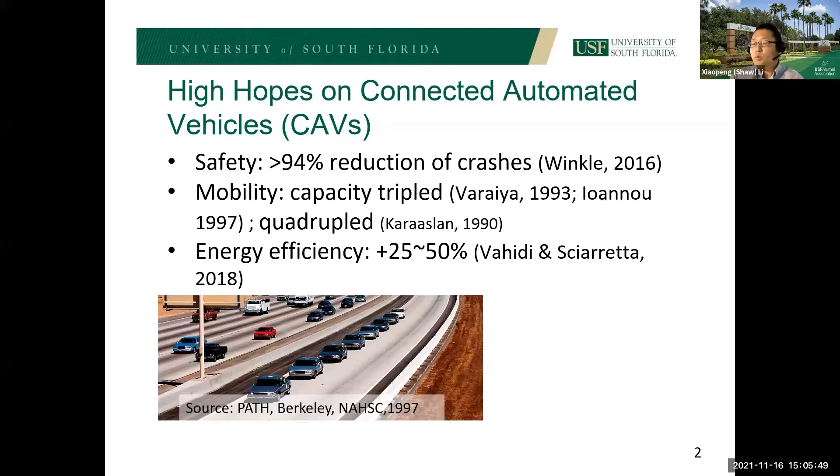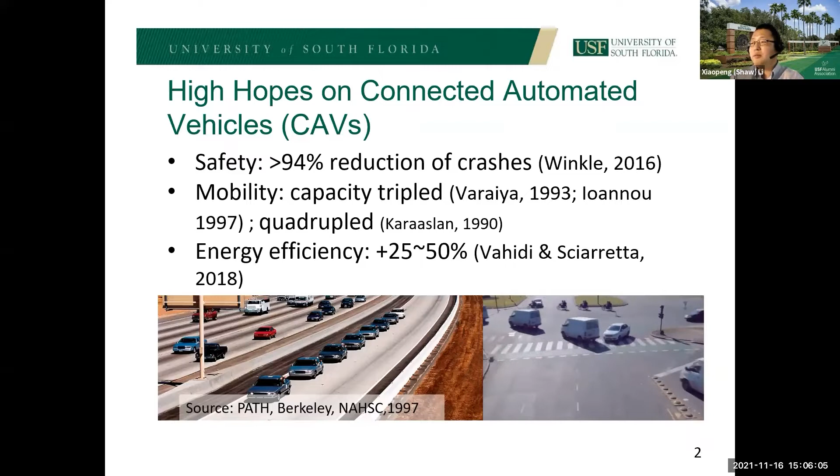With this, it seems like we're on the right track to a utopian world like this, where almost all road users can exist in harmony without even any stop. So that's great, but where are we now? We want to have some status check. So current status, if you look into the deployed and implemented technologies at mass scale, you're going to see the automated vehicles are really ahead of the curve, because we've seen many level 1 and level 2 automated vehicles running on the road. Maybe many of you already have automated vehicles with these features.

So we can see that most new production vehicles have autopilot, adaptive cruise control, these kinds of AV features. And this penetration rate is expected to increase a lot over the years. And I want to draw your attention to the key technology called Advanced Driver Assistance Systems, or ADAS. The component that is most relevant to transportation system performance longitudinally would be adaptive cruise control. And many of you may have cars with this capability already.

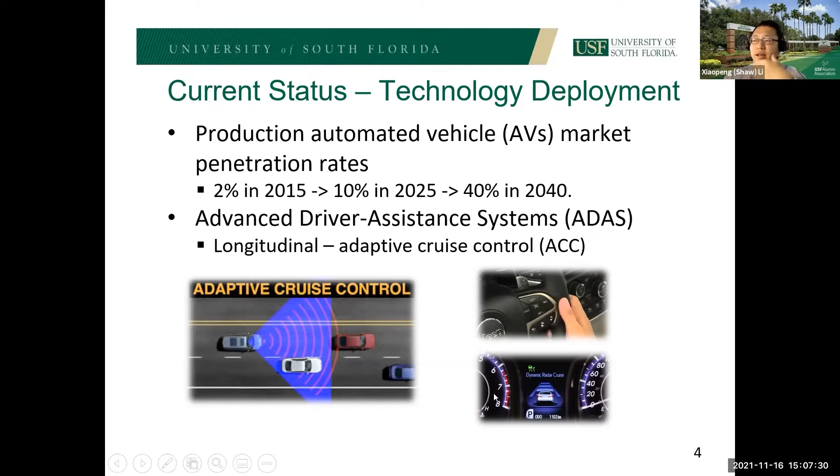It's just like you have an option to choose the desired headways 1, 2, 3, 4, and then this vehicle is going to automatically follow the preceding vehicle without your input on the gas or the brake. So that's the status of the state of the practice. Well, now we're going to look at the benefit. Safety: it is reported that ADAS vehicles could reduce body injury claims by 27% and reduce property damage claims by 19%.

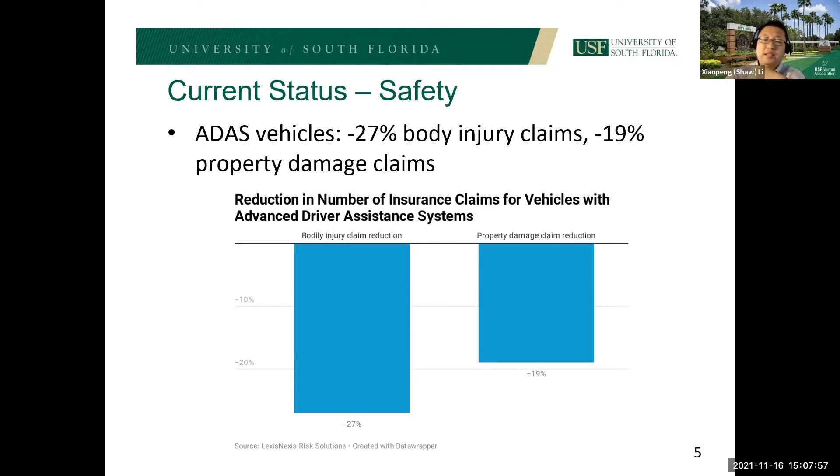What about mobility? You know, the fact is that these companies don't report the mobility performance of these features. So we have to conduct the field tests ourselves and get the data from other collaborators. With this data, we analyze the trajectory data with traffic flow knowledge and convert them into flow and density. We plot out these relationships, also known as the fundamental diagram, for ACC vehicles from automaker 1.

And let me see whether you can see my... let's see, I need to find a pointer, let me see.

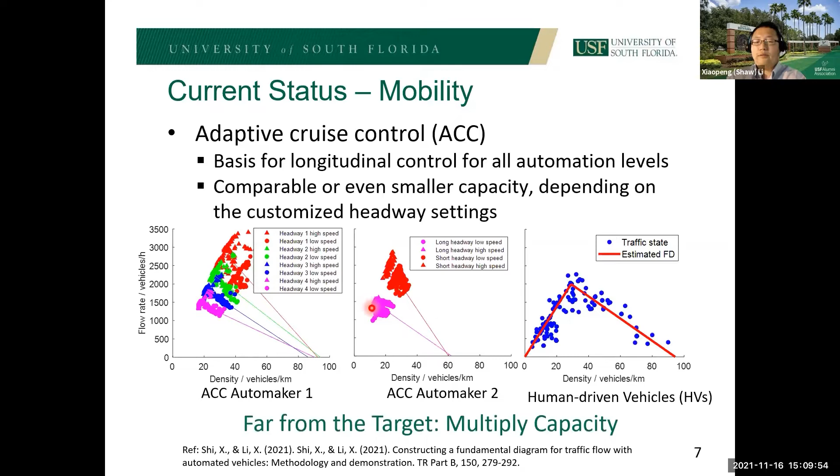All right, ACC vehicle automaker 1 and also ACC vehicle automaker 2, and also comparing them with the data we extracted from human-driven vehicles. And we see that, on the contrary, the capacities of these ACC vehicles or low-level AVs are comparable to that of the human drivers, or in some settings even lower. So this is quite far away from the target of multiplying capacity.

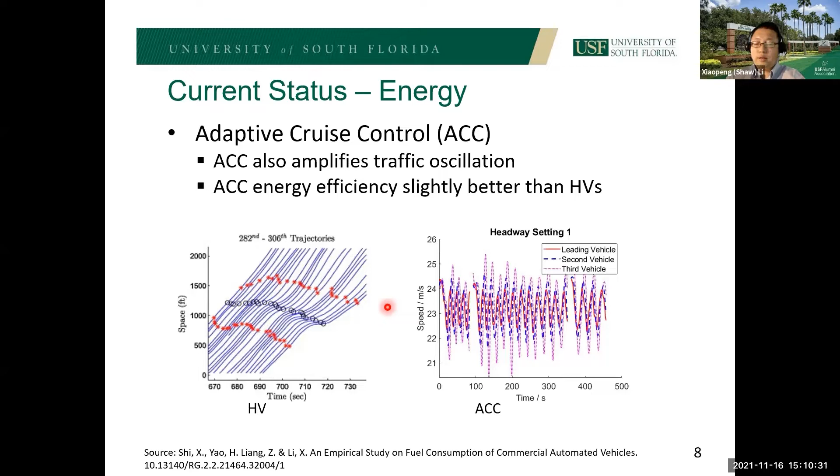Then energy, we also did some experiments to compare human-driven vehicles and these production AV vehicles' energy performance. So basically, both of them amplify traffic oscillations and form stop-and-go traffic eventually. ACC, or AV, could improve the energy slightly, but that's still not close to the target, and there is still quite some room for improvement.

So with this, we can see the potential benefits of the next phase of connected vehicles integrated with automated vehicles. Let's look at the marginal benefits of connected vehicles on top of automation. So in terms of safety, though we hoped CVs could improve the safety a lot, now it looks like from the real world, we observed safety benefits from AVs. They're coming, and this sort of reduces the marginal safety benefits of CV. My bold guess is that AVs alone can improve a lot of safety, and CVs can have some marginal improvement as well.

But the major potential in the future will be at mobility and energy, because from what you see, AV alone doesn't seem to improve much on mobility and energy. And the best outcome is integrating AV and CV, so we can have cooperative driving automation transportation systems, or CDA transportation systems, to realize the full potential of mobility and energy.

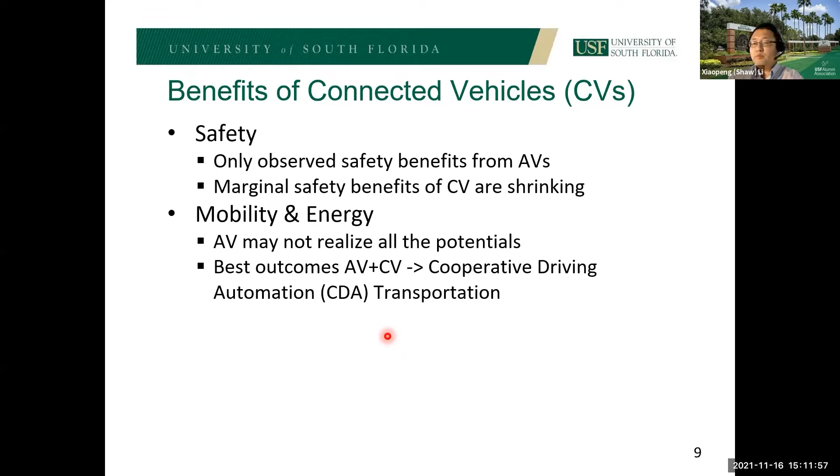However, it is not a smooth road. We know that the FCC provided DSRC, the signature technology for connected vehicles, in 1999, but they took it back in 2020, disappointingly. But the good side is we still see exciting research and piloting programs going on, like the NYC connected vehicle project.

That's proud of your city.

But overall, compared with AV technologies that are already widely deployed in commercial products, CVs are limited to pilot tests and research projects. We don't have massive evidence showing CV benefits yet. So why do we have such great challenges? I'm going to talk in more detail. There are many reasons from different sectors, but I'm going to just talk about some challenges that I perceive from the perspective of engineering, from these three perspectives: system, technology, and user incentives.

So first, the challenge is system complexity, and we hope to address it with system modeling. AV technology alone, if you get to the control level, is actually not that difficult from a transportation engineer's perspective. I know perception of AV is immensely difficult, but on top of that, control is just reactive control of individual vehicles. That's pretty much car following plus lane changing. That's what you guys and we are looking at on a daily basis.

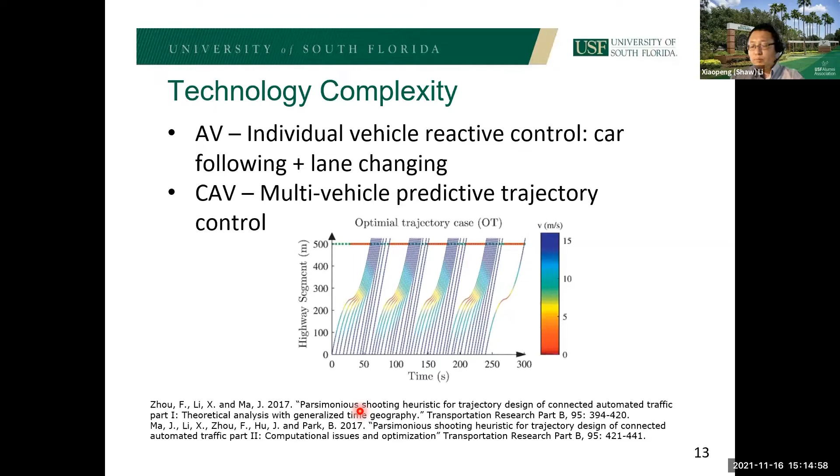So we're among the first batch of publications in the methodology work in this area, and we proposed a number of models. Just to give you an example, I'm going to talk in depth about some of our recent work regarding the key to CAV mobility and energy. So why did I highlight longitudinal control? Because it looks like longitudinal control is the key to realize CAV benefits for mobility and energy.

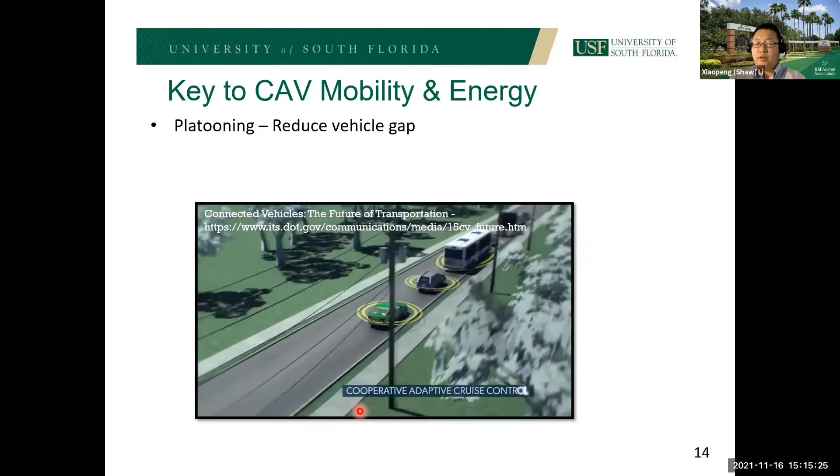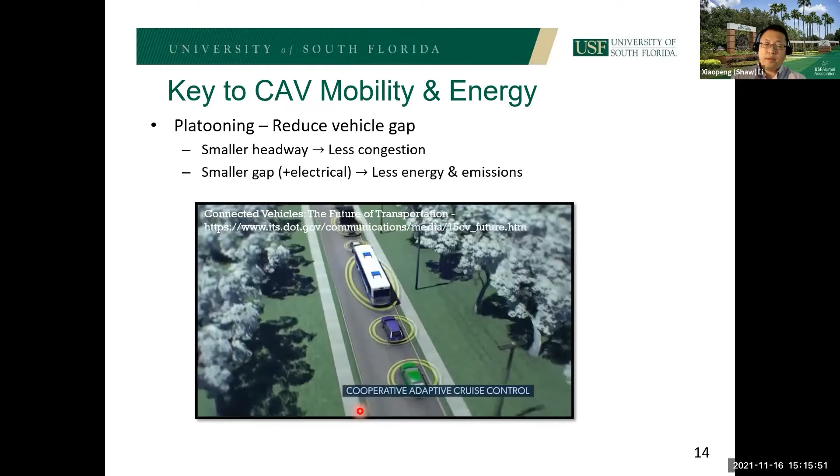Platooning, you might have heard of this, is using CAVs to essentially reduce vehicle gaps. So if we have a smaller gap, we're going to have smaller headway. That means higher capacity and less congestion, a mobility benefit. With a smaller gap, sometimes coupled with electric vehicles, that's the future of automated vehicle technology. Due to the aerodynamic benefits, we're going to have less energy consumption and less emissions. So overall, you can see as vehicle gaps reduce, the benefit increases.

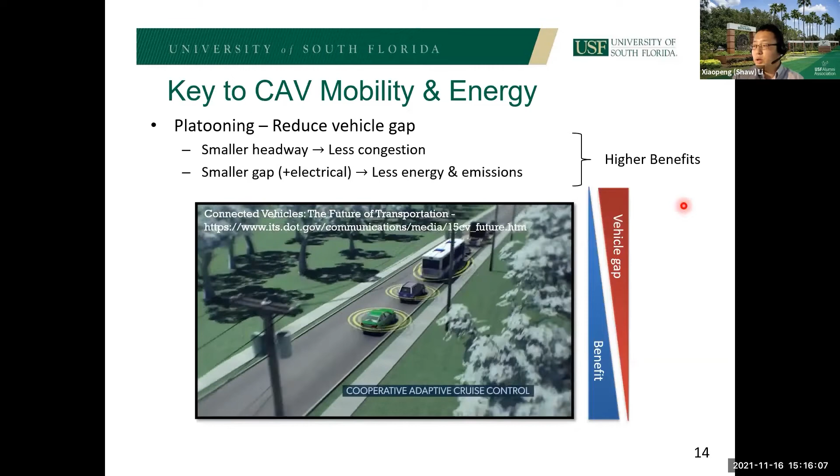So that's why I want to introduce this work about how we can form platoons. I'm going to use this example as a sample of the work that we have done in this area. So this is the example problem. We consider a stream of AVs indexed from 1 through I, from downstream up.

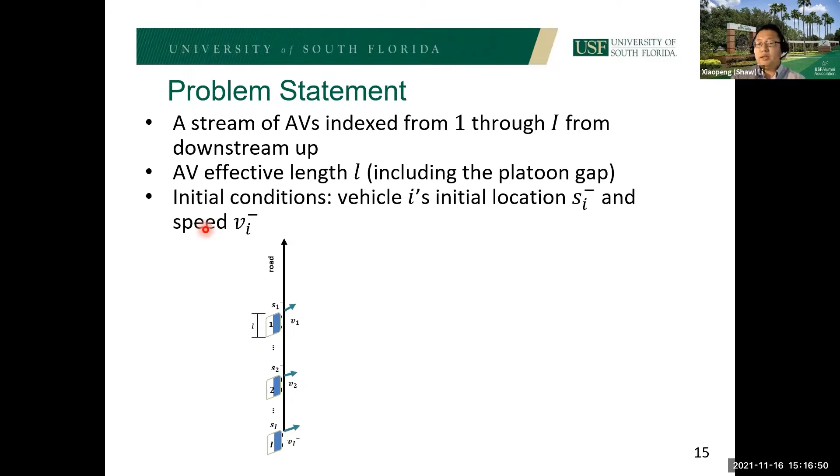We consider AV effective length L, including the platoon gap. At the beginning, they're separate, and we know each vehicle's location and speed and other states. The objective is to platoon them together. So by the final time T, which is also a variable, we want to have them grouped together and cruise at a common platoon speed, Vd.

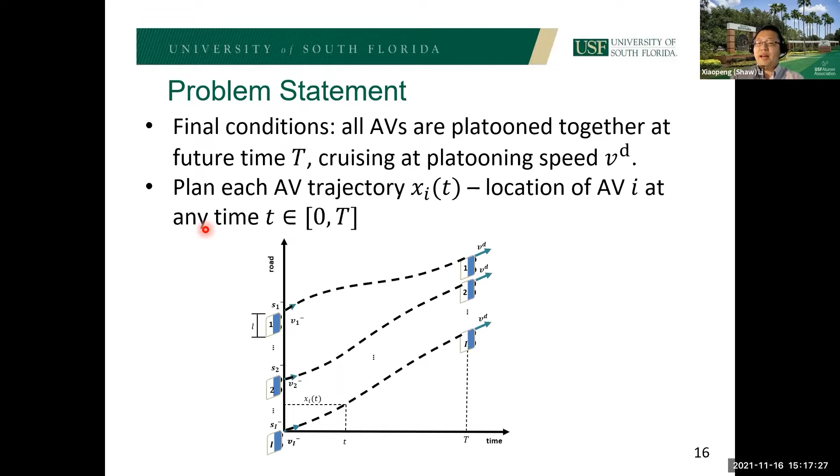So this is the problem, and we're going to control the vehicle trajectories, or more precisely speaking, plan the vehicle trajectories, which are denoted by xi of t. That is the location of AV i at any time t during the planning horizon. And we want to plan the trajectories subject to the following constraints.

First is kinematic constraints. Each trajectory's speed, which is the first order derivative, is bounded from 0, so it's not backing up, and V bar, the speed limit. And the acceleration, or the second order derivative of the trajectory, is bounded by a minimum acceleration or maximum deceleration a under bar, and maximum acceleration a bar.

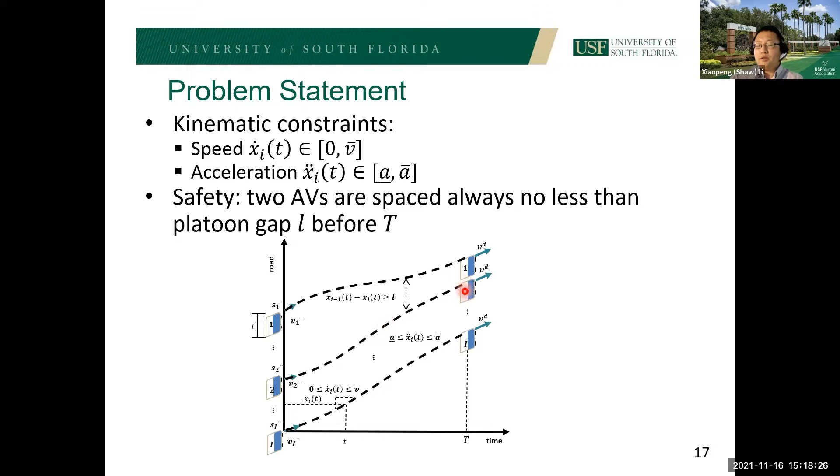In safety, two AVs are always spaced no less than the platoon gap L before T. So before they platoon together, we don't want them to collide. And trajectories will be controlled to optimize some performance measures or objectives that are related to mobility and energy. So it has a sort of two-stage structure.

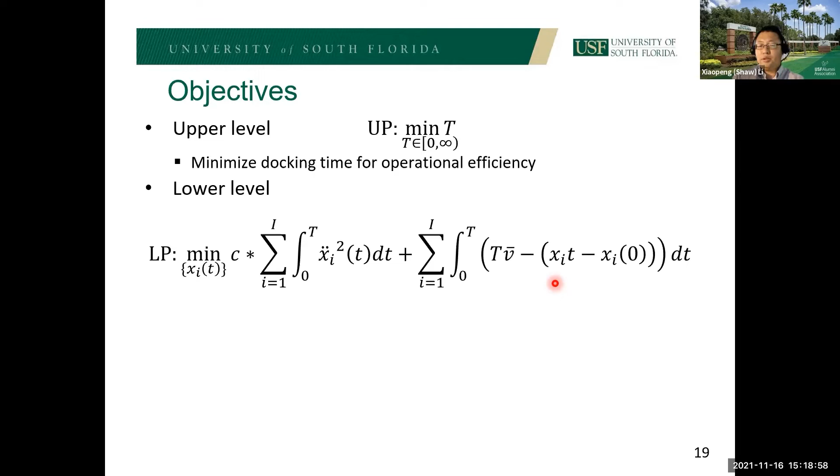The upper level is to minimize the docking or platooning time T, and the lower level has two components. The first component is to minimize the sum of squared acceleration, which smooths the vehicle trajectories to reduce energy consumption and improve driving comfort. This term is simple and has been used a lot for trajectory control. The second term corresponds to mobility. We want to minimize the uncovered distance from free flow.

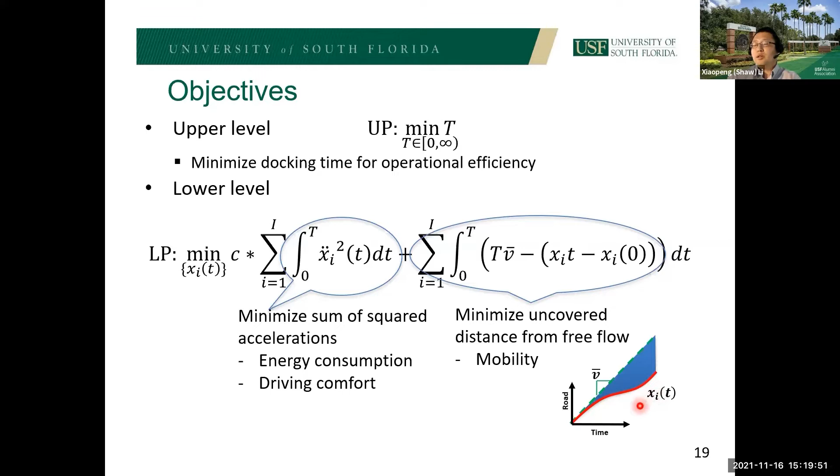What is that? Suppose that a vehicle, if it is not constrained, is going to drive at the free flow speed V bar. But after the trajectory control, it may need to slow down and negotiate with other vehicles to form the platoon. So the shaded area we call its uncovered distance. The smaller this area, the better the mobility, and the less the influence on downstream traffic. So with this, we can build a complex optimization model to approach it.

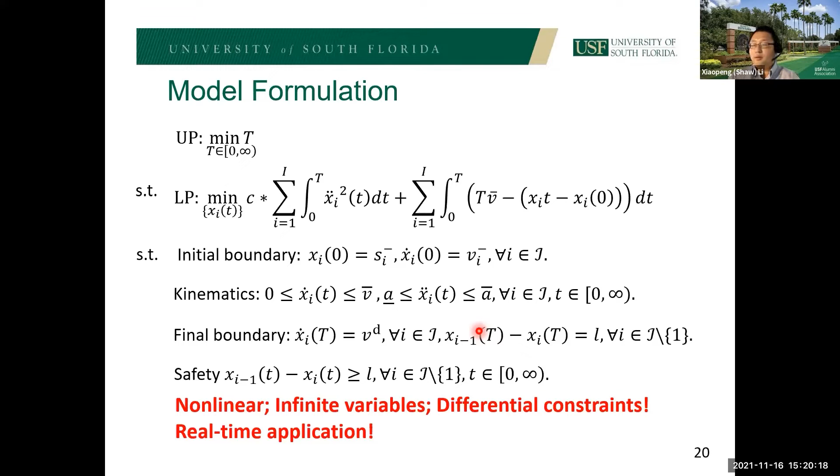This model is nonlinear. It has an infinite number of variables, has differential equations, and it is for real-time applications. It's not a trivial problem. So that's why they need us researchers to solve complex problems. So how do we address it in an elegant manner? I don't want to put it into a solver, which may give you a result, but not that appealing.

I want to look into the problem structure and analytical properties and try to find the best way to solve it. With that, we can get some really fast heuristics to construct near optimal solutions to guide the real-time control. I also want to look into the exact solution as a benchmark to see how well our heuristic will do. And finally, we will verify it with numerical examples. Let me give you some flavor of the analytical properties.

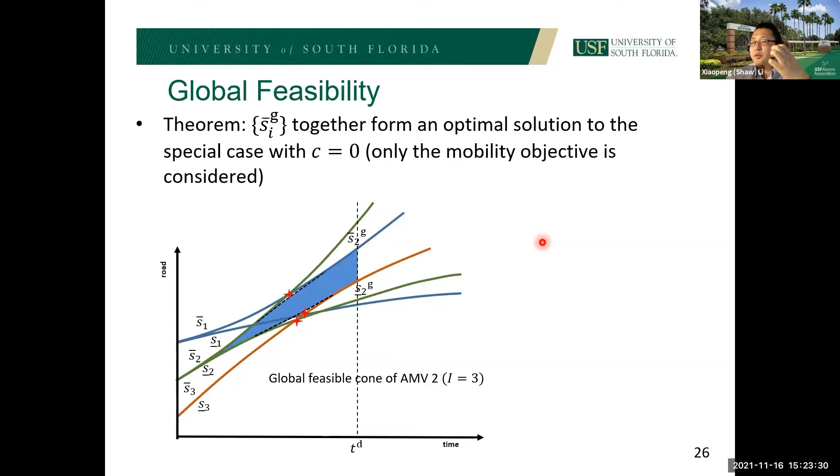Sometimes if you want to take a step further, you can save lots of energy and solve this problem. But we do have the lower level problems. So we came up with a fast heuristic that is also inspired by the analytical analysis of this cone structure. We just look into the feasible cone and within the feasible cone, we can easily construct a smooth trajectory for the first vehicle, and then we shift that down and we merge that with the second vehicle's cone and construct the second vehicle's trajectory. And this can be done repeatedly until we find all these vehicles' trajectories.

So we can easily populate the planned near optimal vehicle trajectories as a collection of simple piecewise cubic functions or polynomial functions. That can be done in no time, and you're going to see it in the numerical examples. And with this, we can also look into the structure and prove that under certain cases, if we get the feasible solution, this is going to be optimal for the squared acceleration objective component.

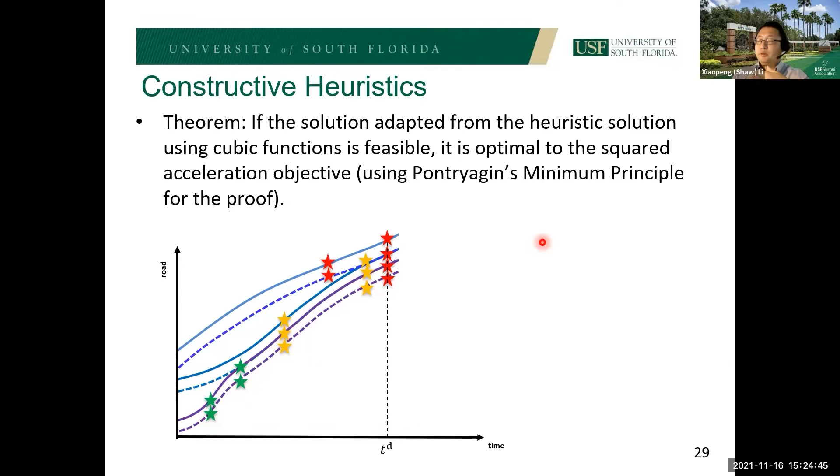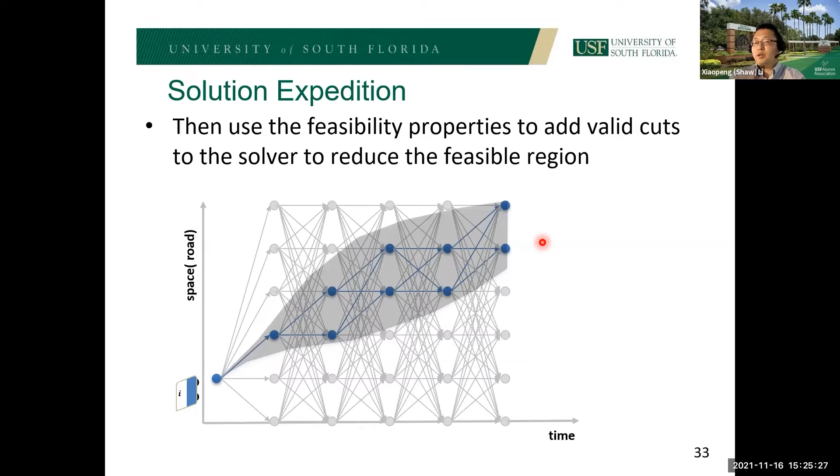And for more general cases, we look into the general solution. This is just like using time-expanded networks or time-space networks to discretize a system. This is just a simplified representation of this problem. We look into one vehicle, but the essence is to find the optimal trajectory, or the shortest path in a way, right? So with the feasible cones that we have created, we can overlay the feasible areas to reduce the candidate routes or candidate trajectories largely. Therefore, we can improve the solution efficiency.

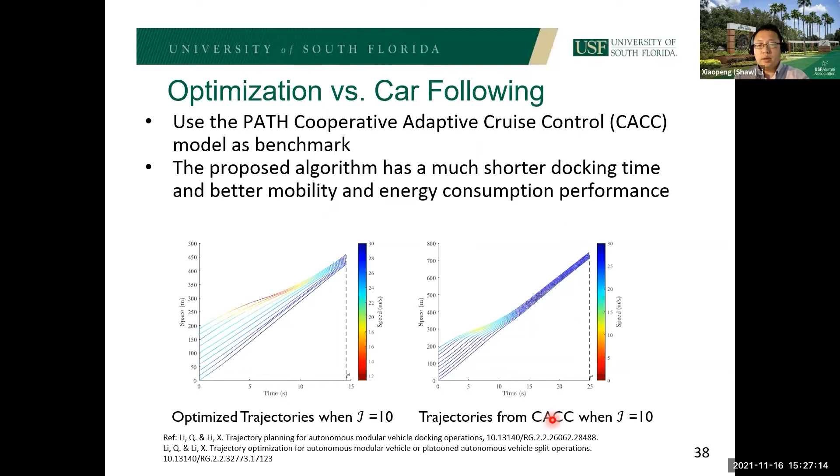Now, I just gave you an example about how we do the in-depth work. Now we step back and look into the breadth of the problem. We only checked a simple setting, one lane, pure automated vehicles, pure CAVs. But in real life, we're probably going to have mixed traffic for an extensive period of time, including both human-driven vehicles, HVs, and CAVs. And they may have complex lane changes, as these trajectories show in these space-time diagrams.

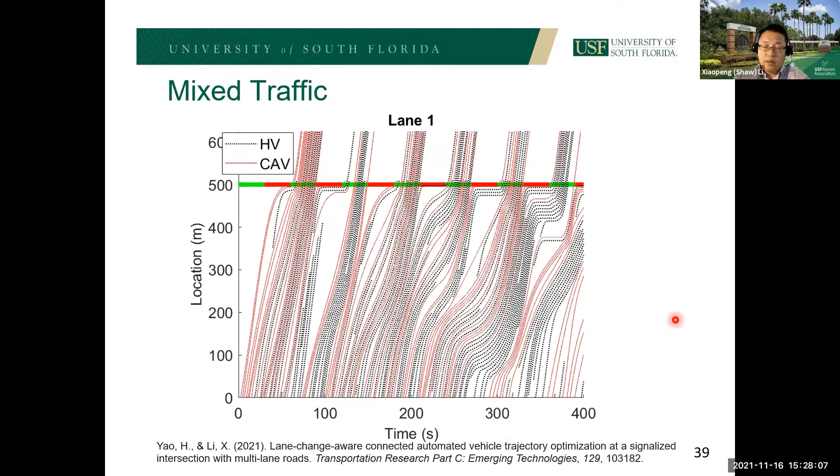We've done some modeling analysis here and published some papers. And from these studies, we realized that one key to successfully controlling CAVs in mixed traffic is to predict human-driven vehicle trajectories or their behaviors with good accuracy. This is simple, because we want to know how other vehicles will drive in order to design our own trajectory. In this way, we can improve the system performance. If we don't know how other vehicles would drive, the CAV control will be very conservative.

We're not going to be able to harness the benefits related to mobility and energy. So in order to do this, we need to have data to understand. But whether you believe it or not, we don't have much trajectory data for us to play with. The one well-known set would be NGSIM, but that's 15 years old. So we actually conducted a study to collect our own data using drones, helicopters, and advanced video analytics.

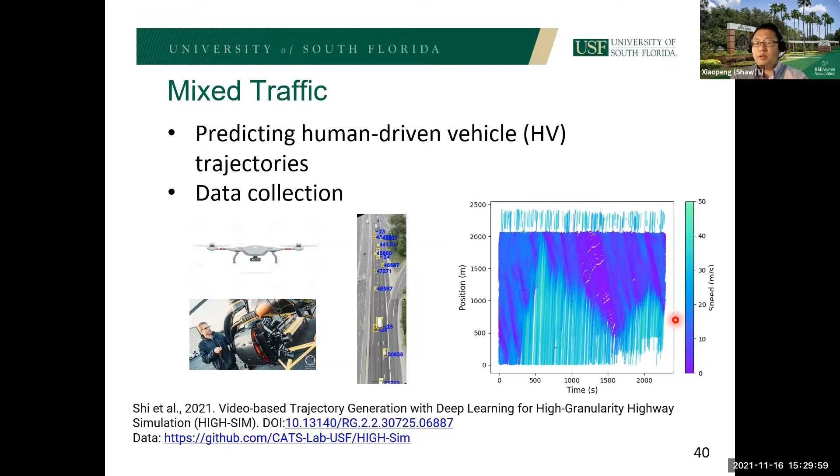We developed the customized tools and extracted arguably the longest trajectory, about 1.2 miles long, including a comprehensive cycle of bottleneck development and dissipation. I'm talking about the comprehensive trajectories, including all vehicles on this road segment. So the data is publicly available here. If you want to look into it, please feel free to download it in this GitHub webpage.

And with the data, basically, before we control the automated vehicles, we need to predict the vehicles' trajectories around. They might be human-driven vehicles. So essentially, a core problem is using history trajectories to predict immediate future trajectories.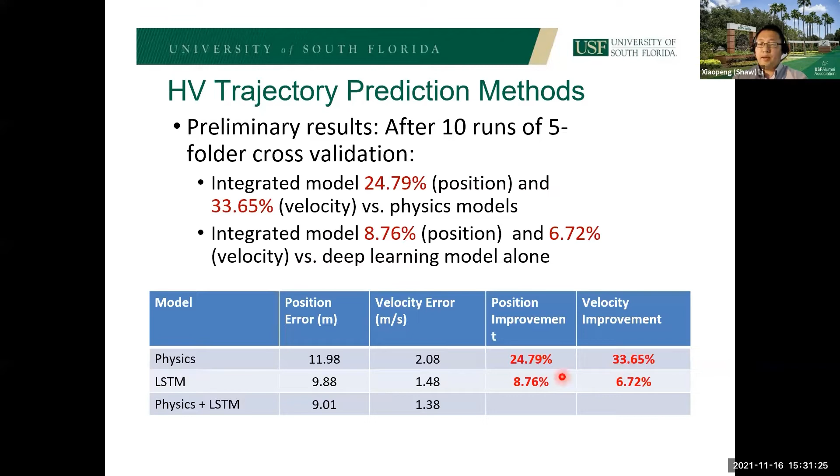So we've done lots of work into this recently, trying physics methods using physics models and pure data-driven methods such as LSTM neural network, and combining physics and LSTM. And we found that combining physics and machine learning would be a good way to go, because that gives you the best performance in terms of position and velocity accuracy.

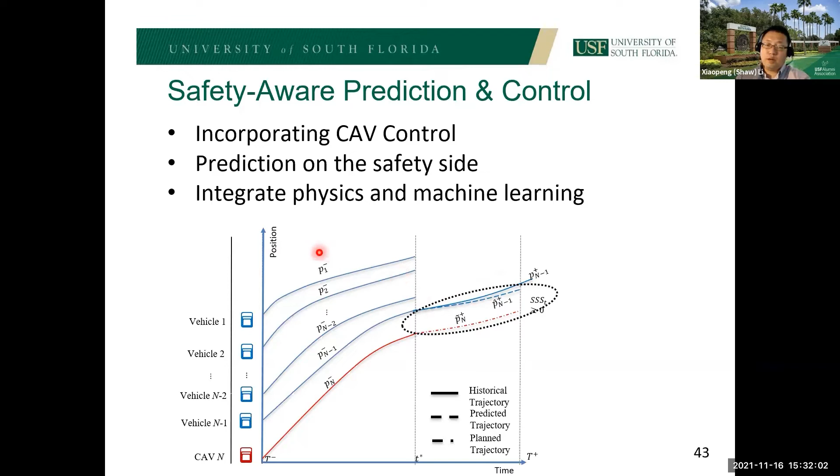And recently, we're looking into this idea of safety-aware predictions and control. So when we predict the vehicle trajectories, we want to consider the follow-up CAV control. We want to make our predictions more on the safety side, but we don't want to be too conservative. We still want to maintain the mobility. So how to balance the guarantee of safety and the mobility need is an interesting problem, and we're trying to integrate physics and machine learning to do this work.

So hopefully that will give you some samples about how we approach the solutions to system complexity. And of course, that's not the comprehensive story. There are many other things that need to be looked at, and I would invite you to look into this space.

After we have all these complex models addressed, we don't want to stop at models in our papers. We want to realize them in technologies. We want to convert them into technology innovation. So I'm going to talk about the second aspect in our roadmap, next step.

Actually, in lots of models, we take it for granted that all these vehicles can be perfectly controlled and their trajectories can be controlled precisely, which is key to the success of CAV operations, but it is not as easy as it sounds. We did some experiments with state-of-the-art vehicles, production AVs, and also we customized them as well using state-of-the-art control algorithms.

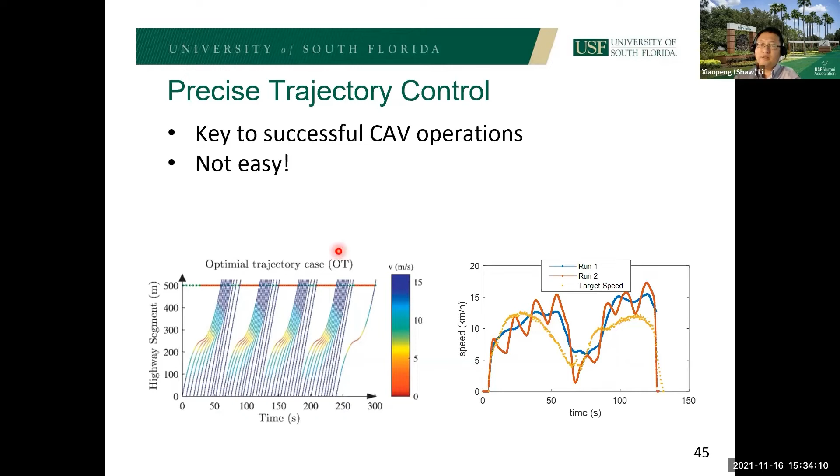So I want to emphasize here that it is important for us as civil engineers, as transportation engineers, to participate in this movement of technology innovation. We need to create new technologies to realize the vision of cooperative driving, not just passively wait to observe or evaluate technologies developed by people from other fields. I'm going to explain more reasons why it has to be us. But right now, we want to create new technologies ourselves.

So how do we do that? We start from something small. We created reduced-scale AV test beds using Raspberry Pi small vehicles, and we add the speed and location following algorithms, and we developed precise trajectory control by combining model predictive control and reinforcement learning. We're still working on it. It's not as simple as it looks.

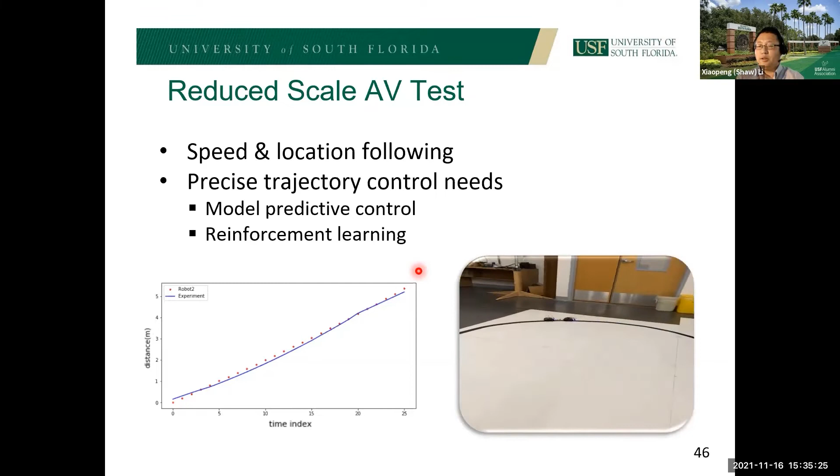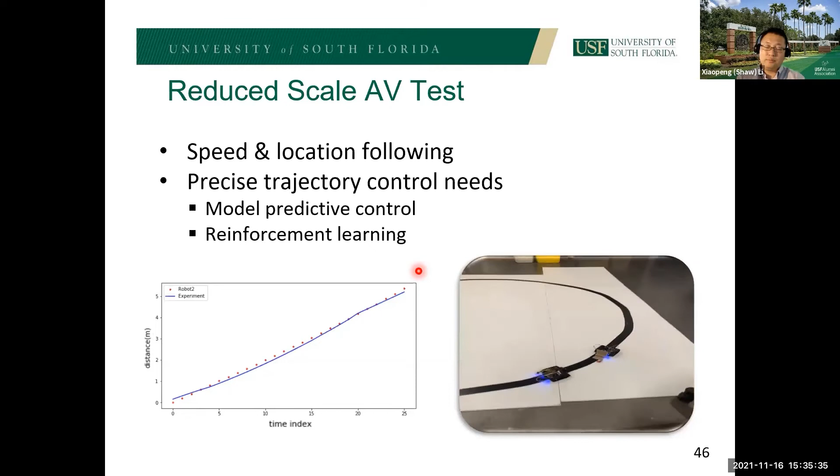So we try to really control these vehicle trajectories a lot better than the state-of-the-art production vehicles. And after that, we're going to move these results to our full-scale CAVs. This is something we're really proud of as a civil engineering lab. We're probably one of the unique groups that assembled the vehicles ourselves rather than purchase the vehicles from a vendor.

We developed the drive-by-wire control. We assembled those multi-source sensors, and we developed our platform and integrated it with the US DOT CARMA platform.

And of course, with this platform, it's something to brag about when important people visit us, like legislators and government officials. But more importantly, it is supporting our research.

So, for example, the previous section about system modeling is all talking about trajectory control on paper, but now we realized it in real life. This is an example. It is coordinating a CAV's trajectory with a signalized intersection in mixed traffic. If you look at the video on the top, the highlighted red box pinpoints the CAV, and the other vehicles running are HVs. So at the beginning, the HVs downstream will just drive at full speed to the signal light without realizing that it is still red.

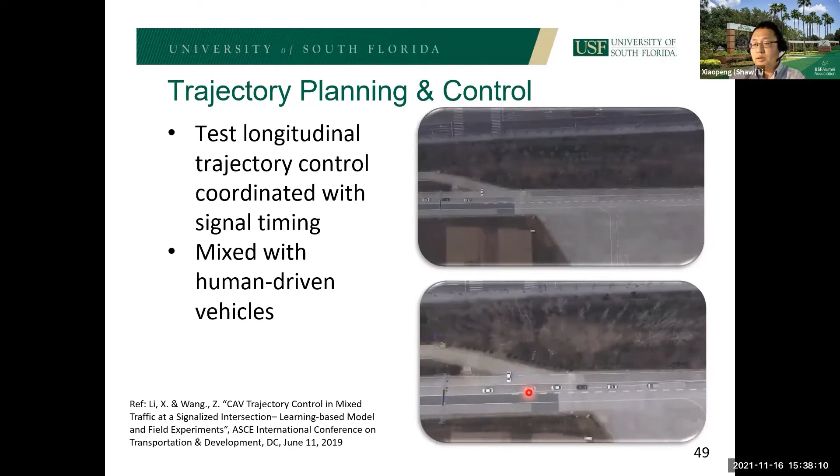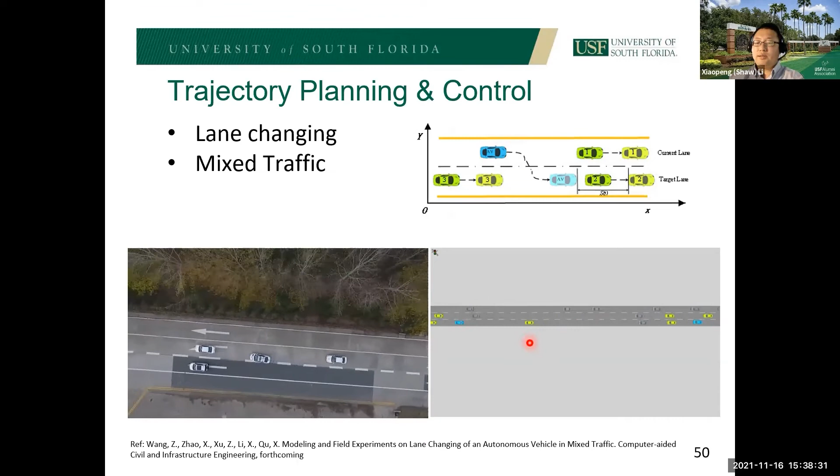And also we have done some experiments on lateral vehicle control, and we also use it to calibrate microscopic simulations and help FHWA provide guidance and suggestions about how to simulate CAVs. These results or tests are still preliminary, and I can say that all the very bottom level trajectory control still needs a lot of improvement to realize the full potential. We're still looking into the very basic trajectory control, incorporating MPC and data-based learning, reinforcement learning. And we hope to report some exciting results in the near future.

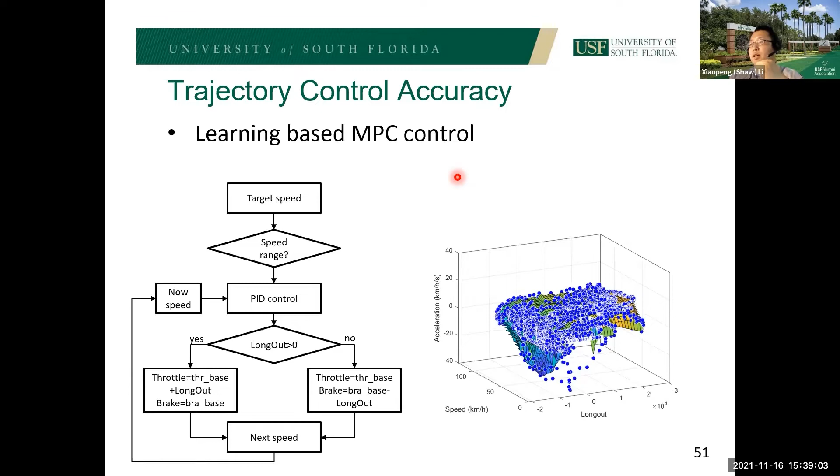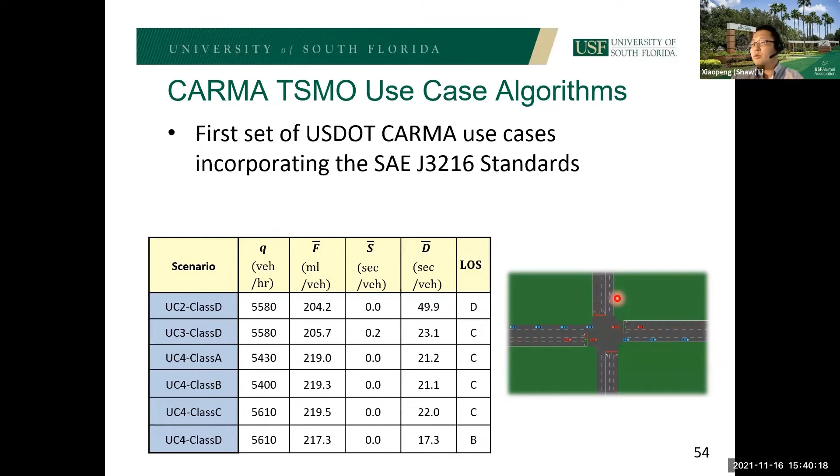So we actually are helping them develop the core algorithms for their first batch of use cases, like intersection control, and we incorporated the newly issued SAE J3216 standard on cooperative driving automation, different classes. And we're not only doing simulation, but we're doing field tests. We're right now integrating their development into our lab vehicles and trying to conduct some first stage integration tests at the end of November.

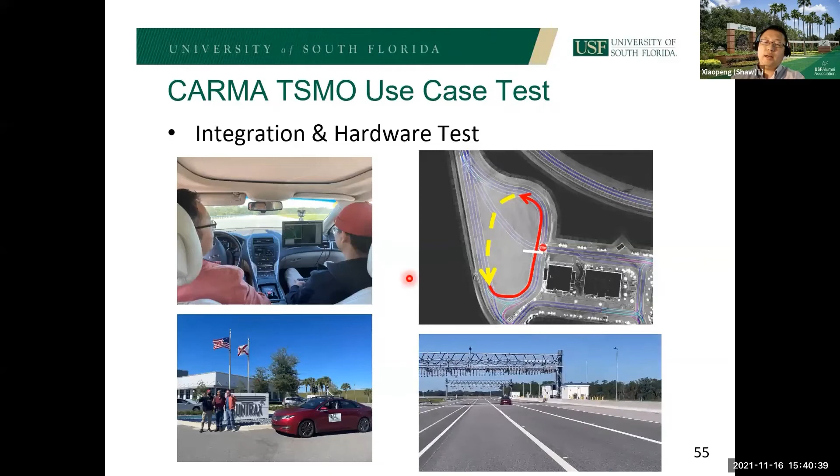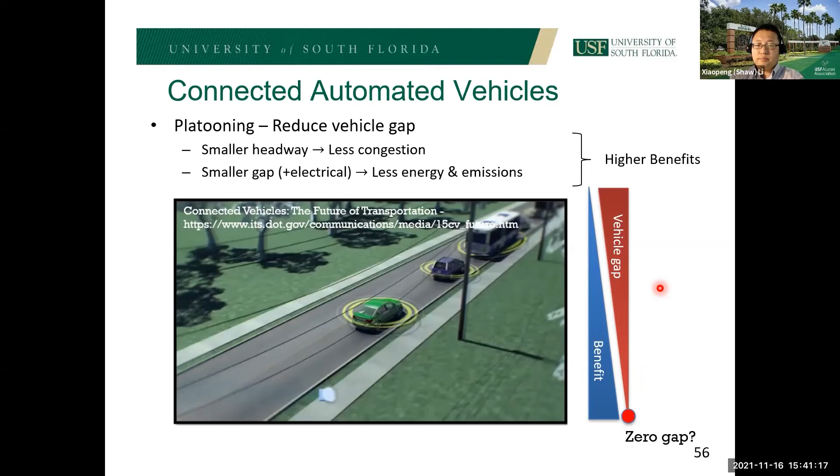Another thing I want to mention is that we really don't want to be satisfied with the technologies that they told us. We want to think further, see whether we can drive all the way to the extreme of the technologies. I mentioned before, the system benefits increase as the vehicle gap reduces. Let's push it to the extreme. That becomes zero gap, right? If there is zero gap, then vehicles are going to physically connect together. And this is consistent with a recent concept called automated modular vehicles.

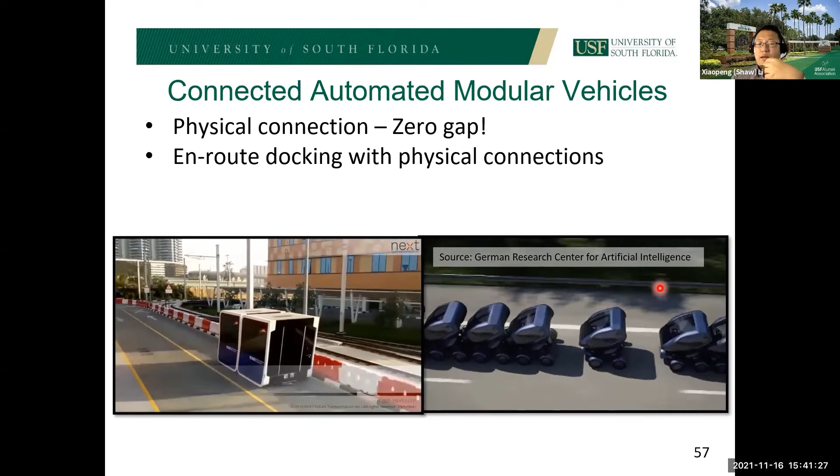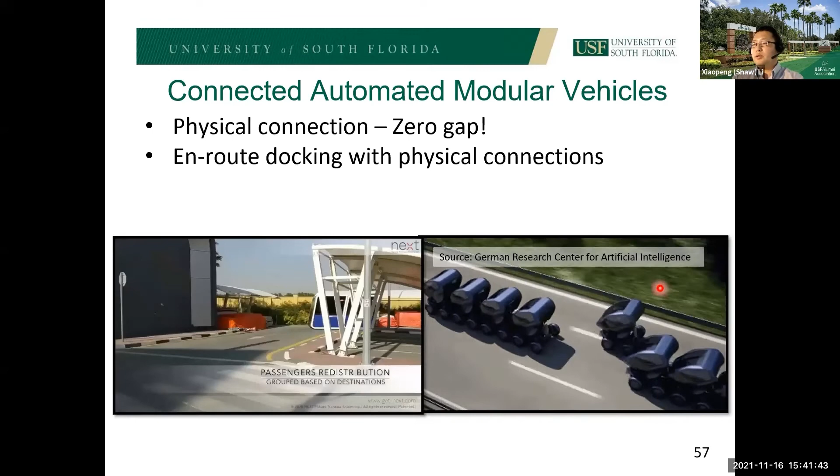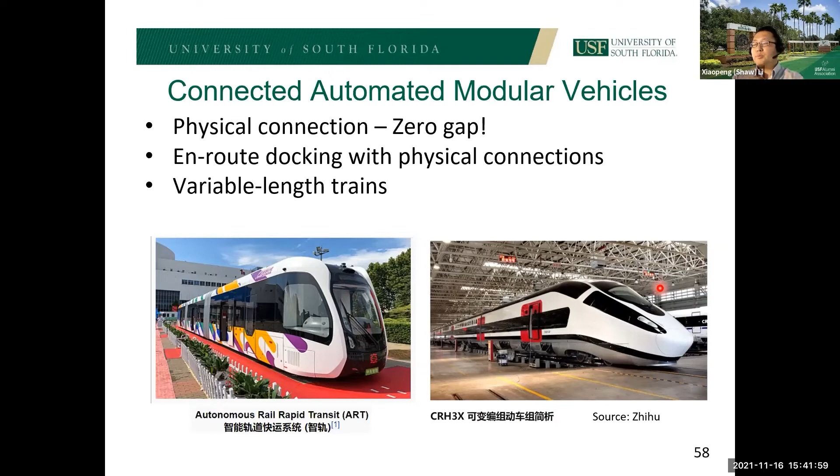So these kinds of autonomous pods can dock and undock while they're driving, right? It has lots of advantages, like allowing en-route transfer, en-route charging operations, and different package delivery services. And also, this concept has been adopted by Chinese railroad operators to accommodate varying passenger demand. And I want to note that Dr. Cho is a pioneer in this research area, and he's probably one of the first looking into the system operation problems, and I'm fortunate to collaborate with him on an NSF project right now.

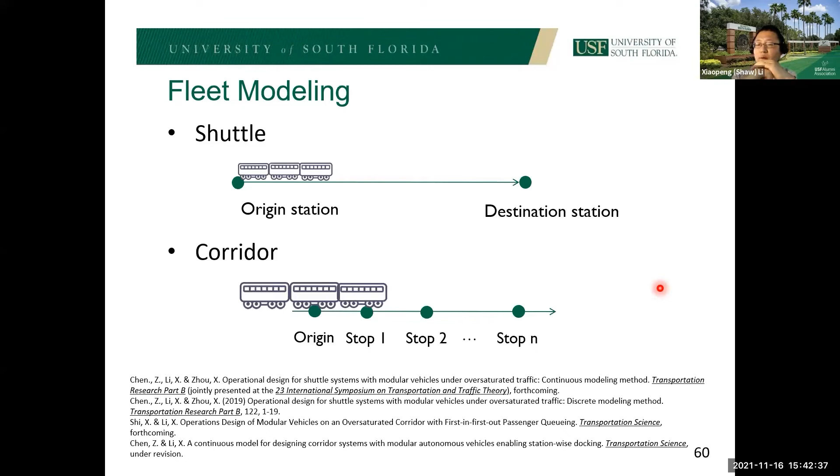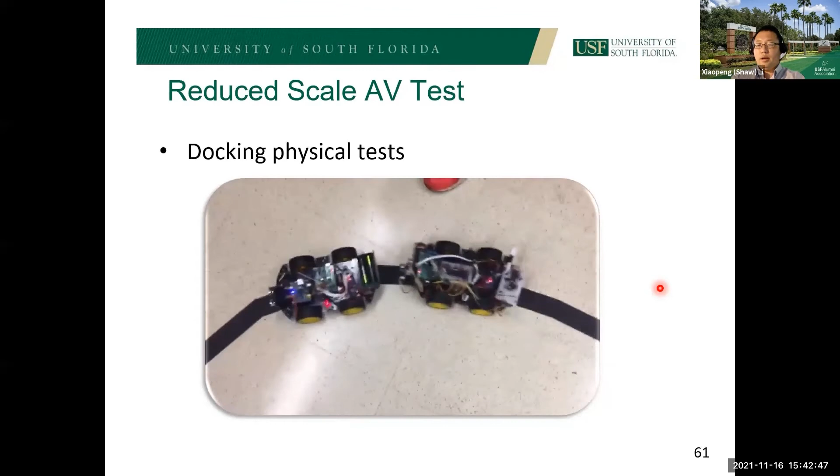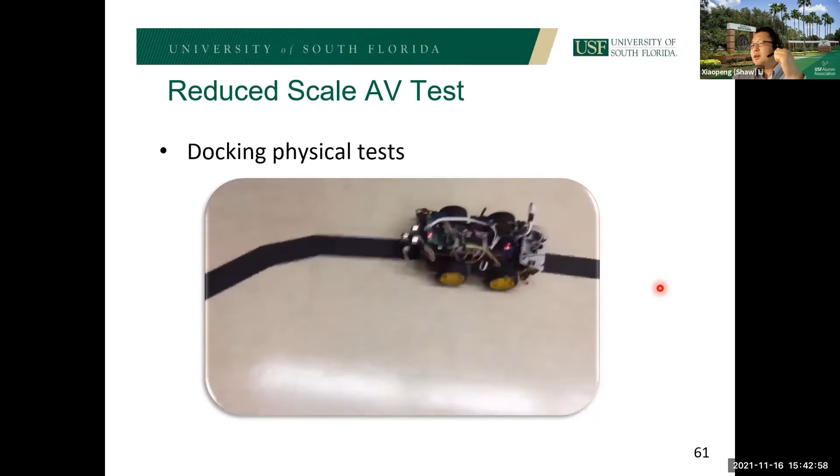And we're working on more relatively microscopic problems like shuttle systems, corridor systems, this kind of fleet modeling and fleet operations. We have some publications, but we're not satisfied with that. We really want to implement it with physical tests. Right now, we're working on reduced scale cars, and once it is mature, we're going to move it to our full-scale vehicles, and eventually, hopefully, onto trucks, because for trucks the benefit is the most articulated.

All right, so now let's look into, once we have the innovative technologies, how do we have the users buy into them, right? How do we incentivize users to use that technology? So do we have a model to incrementally implement these technologies while giving all the players sufficient benefits? So let's look at how we do that.

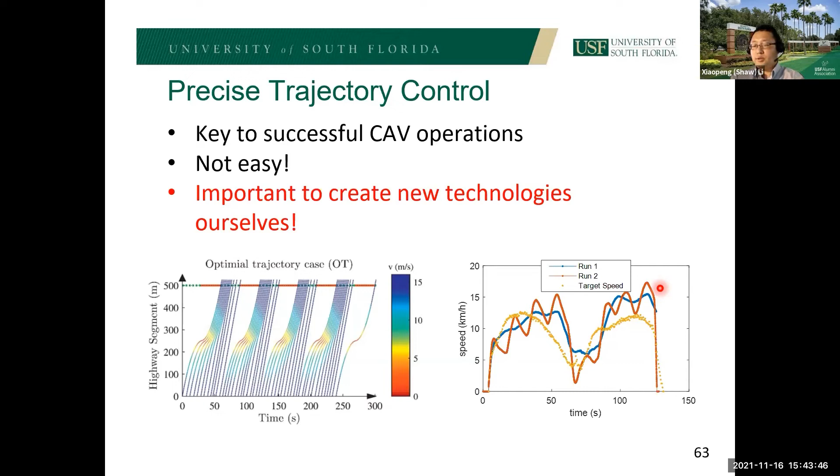I'm going to bring you to a point that I made earlier. It is important for us not only to evaluate technologies, but also to create new technologies. Why? Because if you don't do these kinds of things, people from other sectors may not have an incentive to do it. We may have lots of enthusiasm in the automated vehicle space alone, because the AV benefits like driving comfort and safety can be directly applied to the subject, the AV driver and rider, which can be directly converted into commercial profit, right? They can sell products at a higher price and customers will buy into it.

But the marginal benefit of CV on top of AV is not that intuitive. The cost is direct. The vehicle needs to absorb the cost because it involves added equipment. But the benefit is not necessarily always on the subject vehicle. It's mostly going to other vehicles, because if you're cooperating, you disseminate the information to other vehicles. The primary beneficiary would be the vehicles surrounding you, right? And also for these benefits to prevail, you can only have them realized at relatively high market penetration rates. And that may take quite a while.

So existing lead technology players, AV companies, TNCs, they don't care much about the marginal system benefits, right? They care more about their own fleet's performance rather than the marginal benefits to system congestion. And they do not want to invest in a system with low penetration because they don't see much CAV benefit. So it's important for us to create new technologies ourselves to address these voids, because we care about the transportation systems, we work on the infrastructure, and we strive for social benefit as a whole.

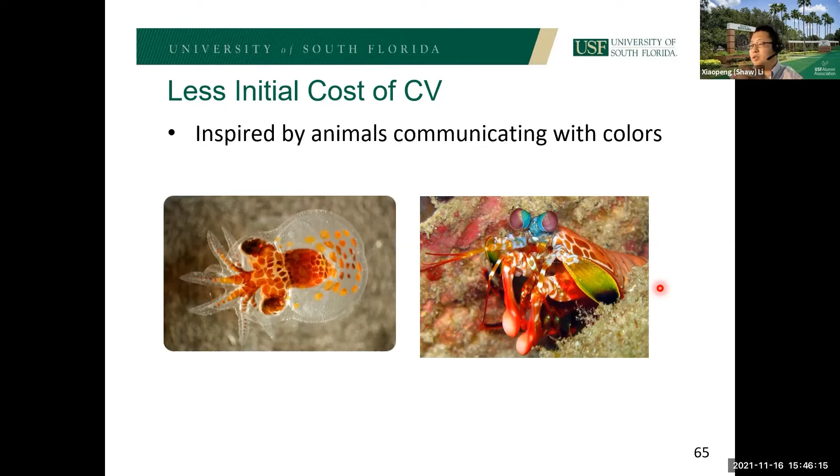Right, I'm going to talk about some examples of technologies and mechanisms we're thinking of to address this aspect. First is to reduce the initial cost of a CV, so make the adoption of CV not that expensive. This work is inspired by animals communicating with colors. For example, some sea creatures can change the colors on their body to convey a message. So we see there are actually lots of lighting sources and receivers in transportation systems. They're readily available. We don't need additional infrastructure investment.

For example, this is one on the information transmitter side. This is a picture I took one night when I was at the Walmart parking lot. I saw a vehicle flashing a rainbow-like running light. It looks like we can have lots of information inside of it rather than just a cosmetic purpose. And also on the roadside, we have lots of these dynamic panels like variable speed messages. And we could program them in a way that can be read by autonomous vehicles.

And in terms of receivers on the vehicle end, most newly produced vehicles are equipped with cameras all around the vehicle. And also on the roadside, CCTVs, right? Surveillance cameras are widely available. We could take advantage of them. So we got a project from DOE, the so-called Visual Enhanced Cooperative Traffic Operations System, VECTOR. We're trying to develop a protocol using flashing lights and arrays to communicate information. And we also build upon it: we want to distribute cooperative driving automation control with this kind of communication scheme.

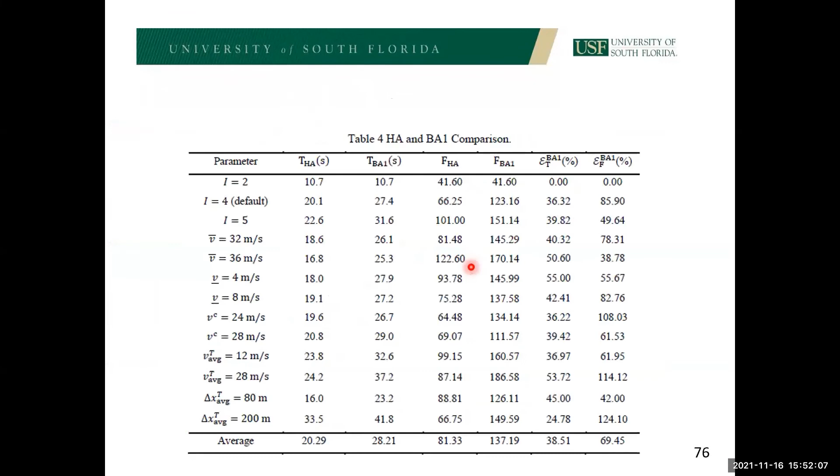Yeah, I think I saved some backup slides for this question. I knew you would ask me about that question. So we did some experiments about how human-driven vehicles would react differently to autonomous vehicles, right? If they reacted the same way, we can comfortably use the historical human-driven vehicle data. If they react differently, maybe we need to do some new experiments.

So we basically tried to experiment with two types of autonomous vehicles. One is with conspicuous settings: you can see it and understand it's an autonomous vehicle. The other is you can't tell whether it is an autonomous vehicle or not from the appearance.

So we've done lots of analysis, but the conclusions are that HV behavior models might be different in mixed traffic compared with existing traffic. For conspicuous settings, that is when you can recognize the surrounding vehicles are automated vehicles, you may react differently. But for inconspicuous AVs, existing HV behavior models in pure HV traffic still apply to mixed traffic. There is no statistical difference between their car following behaviors and the macroscopic headway settings. So basically not too much difference in both macroscopic traffic flow characteristics and the microscopic car following model. So in that way, we can at least get a lot from the existing data.